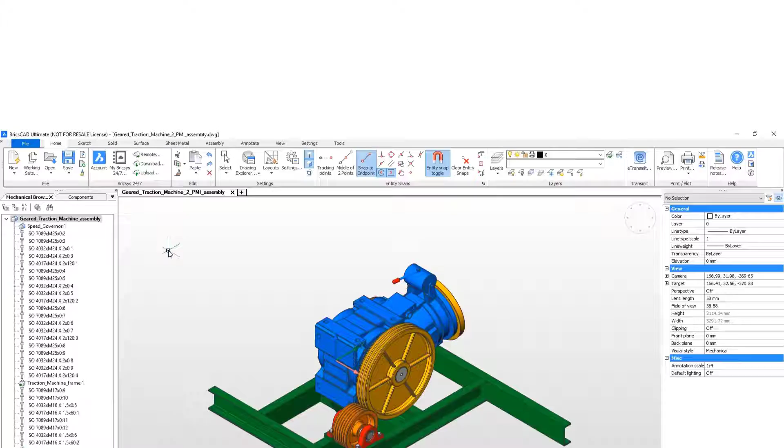In this assembly, there are some problems. The two wheels do not intersect correctly. This must be changed. The sheave wheel cannot be modified because it is already too small, so the wheel of the engine must be changed.

For this, you'll need BricsCAD Platinum. Form a component from this wheel.

Change the color of the wheel so that it differs from the original design.

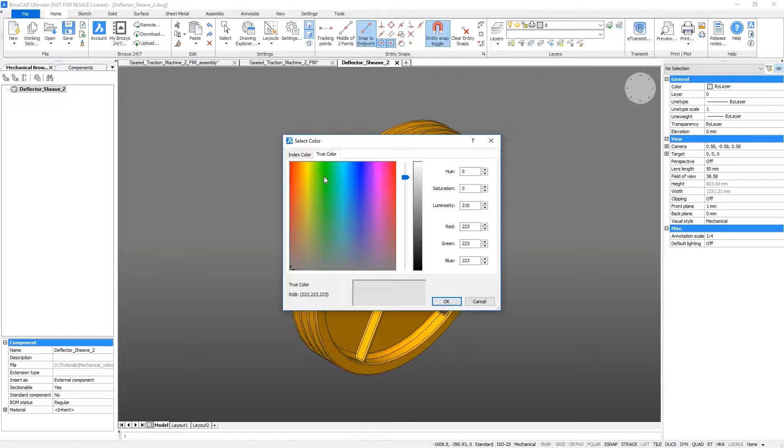Remove the grooves and smooth fillets.

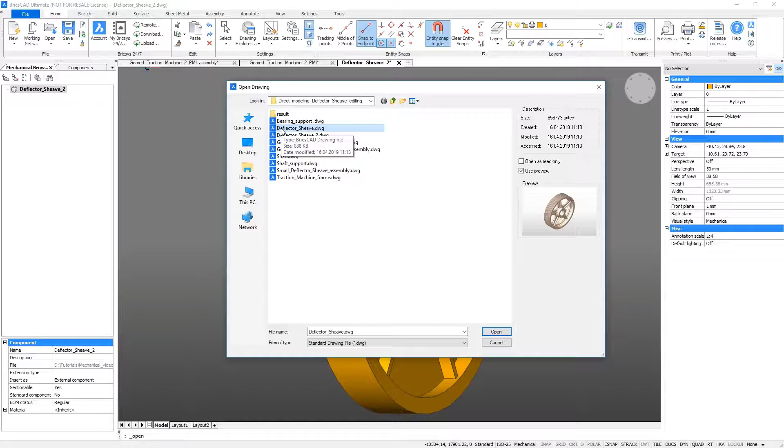Copy the previous wheel.

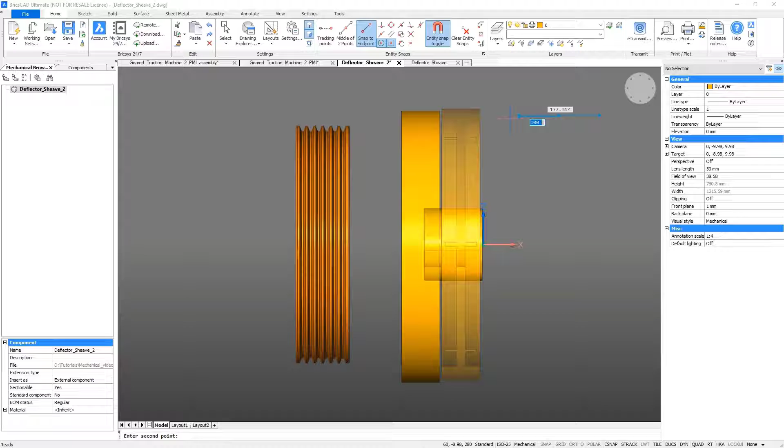Move the wheel slightly to the right.

Now adjust the diameter. To do this, use the push-pull command on the cylindrical face to change its radius easily.

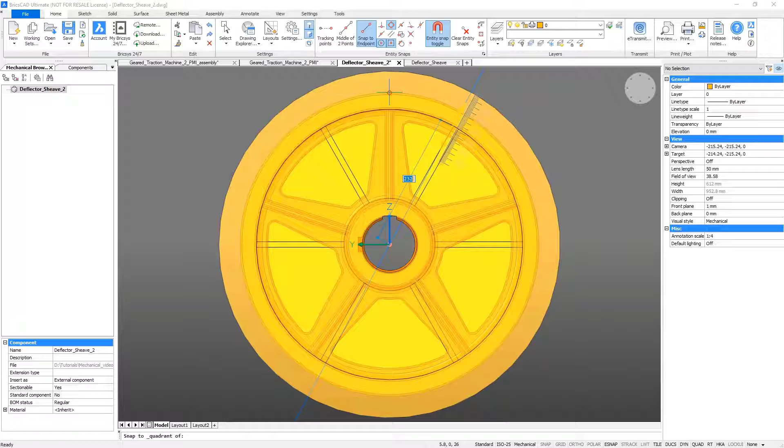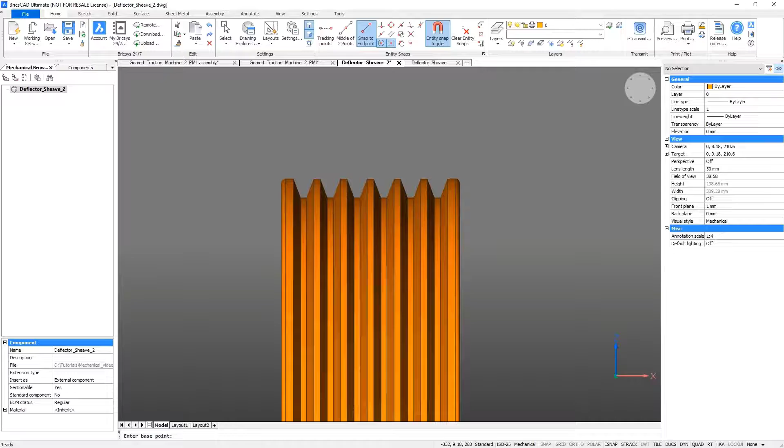Now copy the grooves from the original wheel to the imported one. Use E-snaps to snap to the center point of the circular edge.

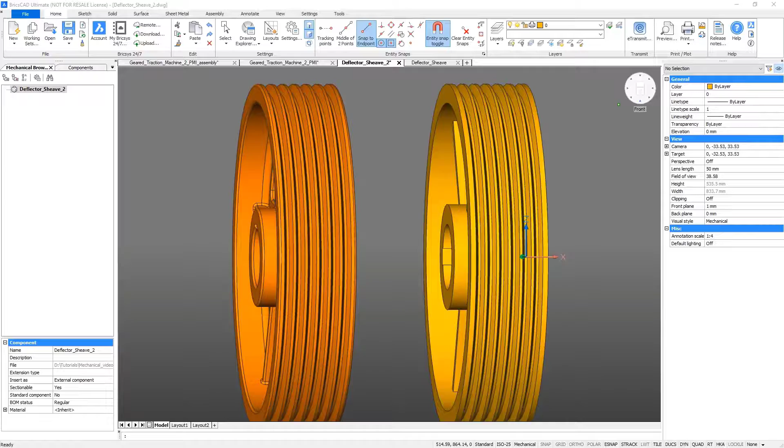Delete the original deflector sheave. Now add fillets.

Because the width of the wheel increased, the weight has too. To decrease weight, add holes. Draw a circle on the corresponding face and extrude it. Then apply a fillet to the edges.

Now use the powerful Copy Faces tool. Select Multiple to copy the feature with just one click.

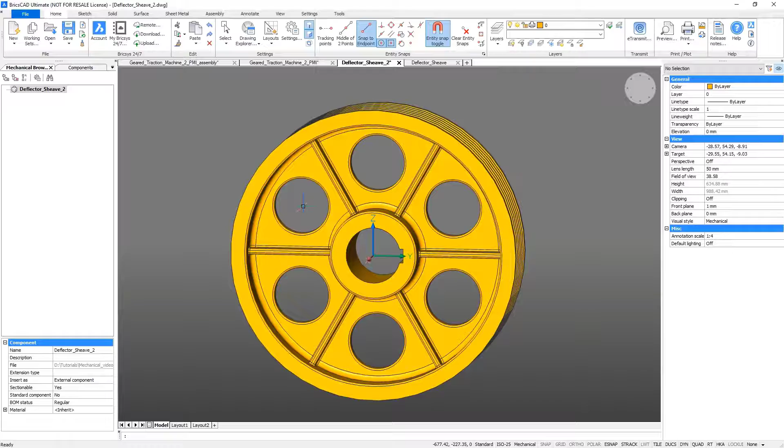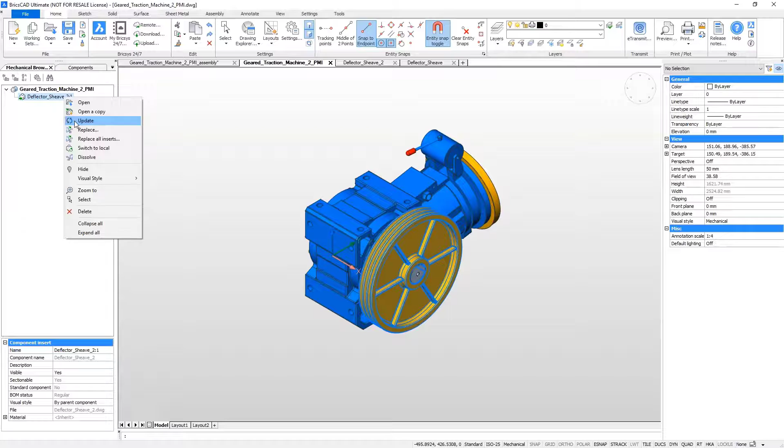Save the wheel. Switch to the assembly file and update the wheel component. The two wheels now fit together perfectly.